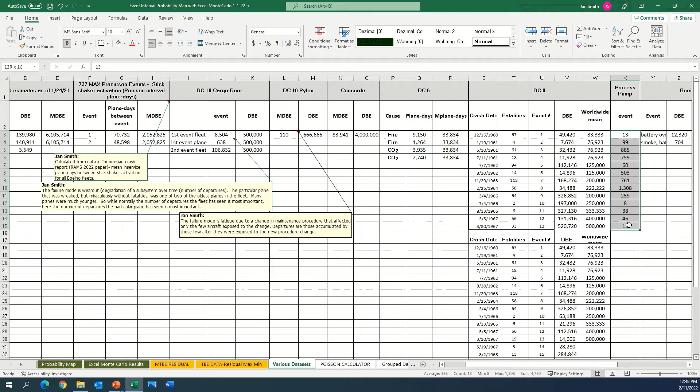So let's go to a sheet called various data sets, and you're probably interested in the 737 MAX that we're going to get to, but the concept cannot be understood and accepted if we are using only one event or 2 events. It's too special purpose. So we're going to start with a more general data set that allows the concept to be developed before we jump to the 737 MAX.

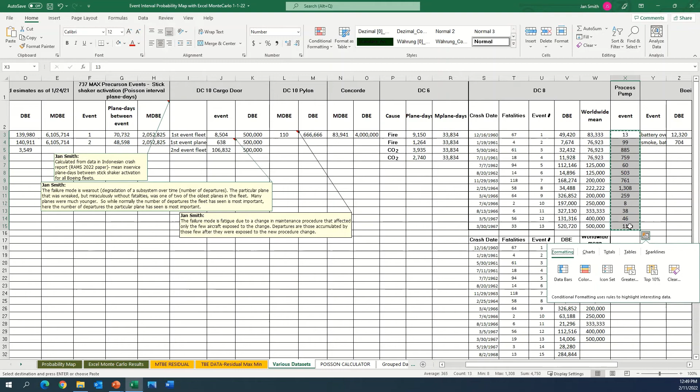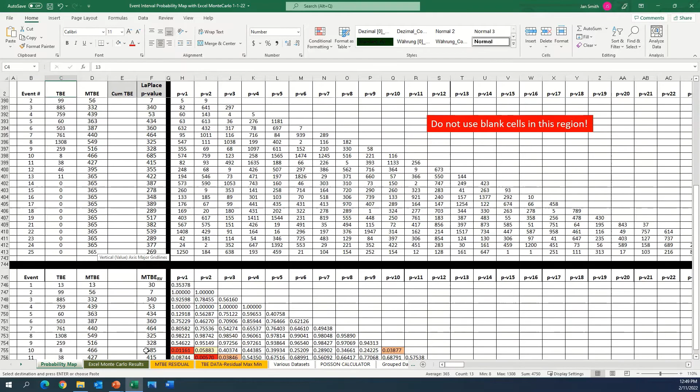So this is process pump time between failure data in days, real data from the petrochemical industry. We're going to copy that and place that into this green region. We'll maintain formatting, and the formulas that are in the cells in this sheet as well as these other sheets draw upon this data and begin the analysis.

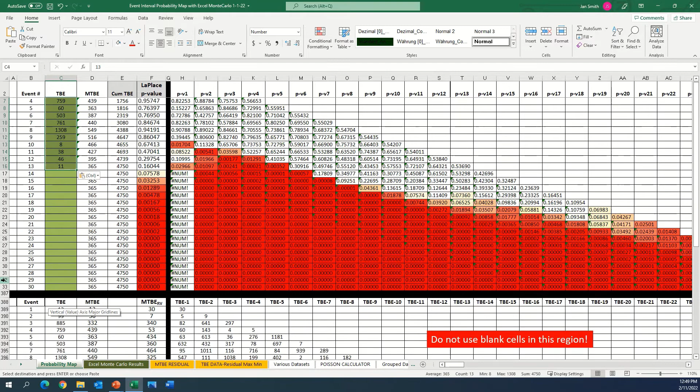So what we have here are some rows that are hidden because we're going to be scrolling between the 3 sections of the probability map, and the hidden rows allow that scrolling to be easier.

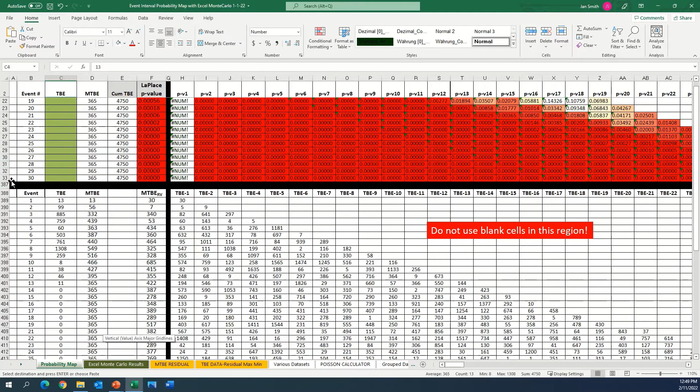There are some empty cells, and this simply is to give us a working range for our data set. Most data sets would fall perhaps within this working range. Because we have empty cells, we are generating some error messages as well as some junk numbers due to empty cells. We don't want to be distracted by that, so we cover up this image, and this image will also be helpful when we evaluate one row at a time.

Our analysis is one row at a time, and that'll be clear as to why that is as we go along. Let's explain the column headings.

The first column is empty, and that is simply for ad hoc calculations, and we'll be using that later. The event number, the first event occurs, the second event, and the analysis is conducted contemporaneously upon the arrival of the event. So the data set is developed. At this point, at event 3, the data set consists of 3 values, and then the data set consists of 4 values, and then 5 values, etc. So each line is developed using only that line and the data that is above that row.

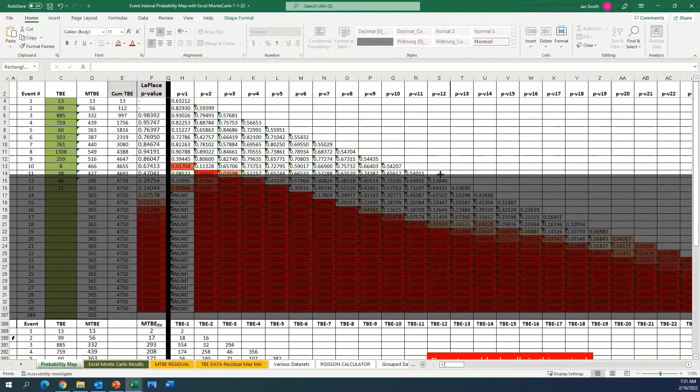p-v2 at event 11: there's 5 chances in 1,000 that this could occur by random chance when there really is no trend in the data. But that's really strong strength of evidence, stronger than necessary.

We trace our low p-values back to event 10, where the first opportunity to identify a degradation is the very first event, the very first low TBE value at event 10.

We see that there's 17 times out of 1,000 this could be a no-trend system, and we can have a value as low as 8 when the system mean is 466. 17 times out of 1,000 this could occur simply due to randomness in our values, but that is sufficiently low that we can reject the null and say, yes, there is a reliability degradation.

Despite limited data and only one short event, we can make that determination. And so we reject the null.

What it means is that for this particular pump, what should be done is to get this data the day the event occurred, right after the event. Sometimes we have to react almost in real time, but depending upon the system, we would get this number the day that the pump failed, or possibly the following day.

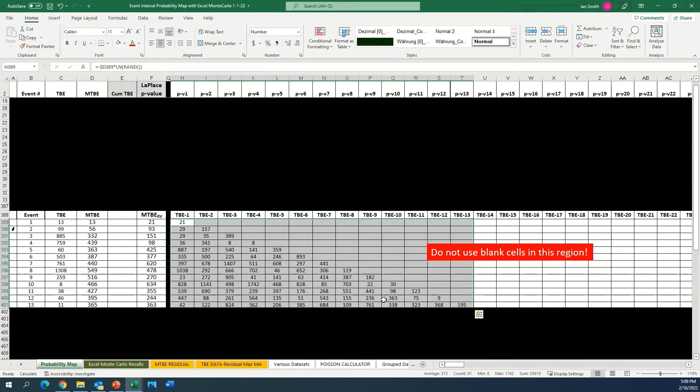Let's see how we get these numbers. Where do these TBE samples come from? There's an image off screen that will help in that regard. So what we have is that we are resampling our null hypothesis. The null hypothesis is that the system is a homogeneous Poisson process.

From reliability theory, this equation holds for our null hypothesis. Our null hypothesis says that for a complex system that is steady state as far as reliability is concerned, then this is the reliability of that system behaving like a homogeneous Poisson process and has a constant lambda. When lambda is constant, we can replace lambda with 1 over MTBF in this relationship.

Now, 1 minus reliability is unreliability, and unreliability is the time to failure. So if we set this relationship equal to a random number and solve for t, then this relationship here, where time equals minus MTBF times the log of a random number generated within Excel, this is a time between failure sample.

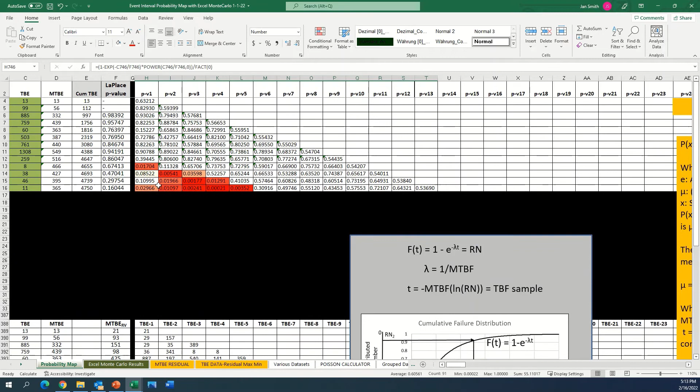Now, for each MTBE random variable number, we get a new calculation for our Poisson probability values. All of the formulas in these shaded cells are exactly these, but these draw upon the data set mean. These here in the lower thirds portion of the probability map draw upon MTBE as a random variable. And so this is how we get probability distributions around our p-values—getting MTBE as a random variable, and then using that new random variable sample to get a new sample for our probability values, which also form a probability distribution for our false positives.

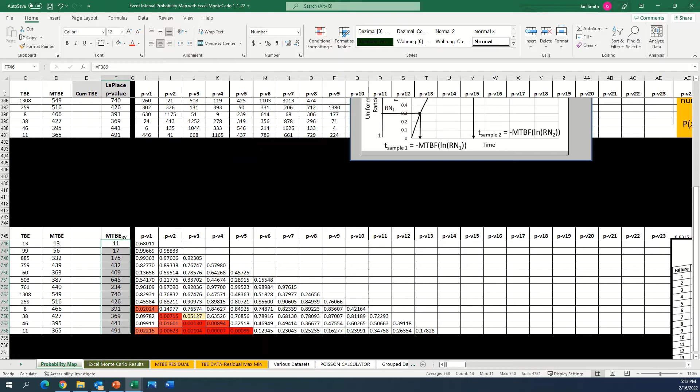So we now actually get those distributions in the sheet called Excel Monte Carlo results. We get probability distributions using this sheet. This is a 10,000 row data table and a 1,000 row data table.

We reference the cell that we want to get a distribution for here. A random variable goes there. Let's go to the probability map and let's get PV, this PV1 at event 10. We want to assess that, so let's reference that cell.

We simply enter it and go to the Monte Carlo sheet. We have to hit enter here, then go select that cell here, enter, and when we run, hit F9, it will generate a probability table with values and form a distribution.

Here in this one, let's reference the cell for the probability distribution around this random variable. It has to be a random variable cell that we select. Now when we hit F9, it will take a few minutes and we will generate distributions.

This 1,000 row data table takes a few seconds to run if this one is blank, and this one takes just a few minutes. As we'll see, the resolution of this data table is excellent, but it takes a few minutes. The resolution here is not so good, but it's good for just learning and training and exploring your data, and it only takes a few seconds.

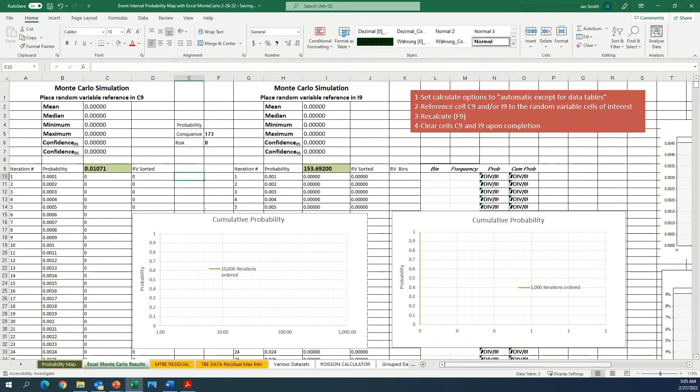These are the distributions. This data draws upon column B and column D data. So what we're doing here is generating for each iteration, by way of different random numbers, samples of our PV1 at event 10. And we are resorting these 10,000 random samples of PV1 from smallest to largest in this column. There are 10,000 of these, and because they're generated by a random number process, the distributions are smooth.

We can query column D to get confidence intervals for any level. We're set up now for 90% confidence level by referring to the proper cell in column D. Both the lower and the upper cell can be referenced. We can change this cell reference and get any confidence level, but these are 90%.

So confidence levels range from essentially 0.01 to 0.03—very tight confidence intervals, although we only have one quick failure and a very limited data sample from the pump with our unknown mean. And so this is the distribution.

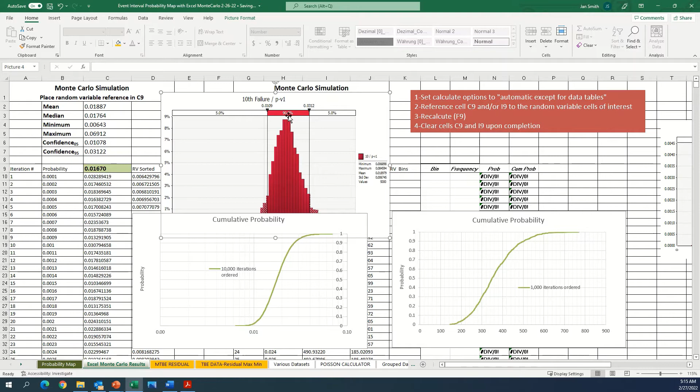If we look at some data that has been published in earlier papers, we used Palisade's @RISK Excel add-in software to analyze the PV1 at the 10th event, and this is probability density versus cumulative probability, just different ways of plotting the data. We had a lower 90% interval of 0.0109, 0.0108 close, 0.0312, 0.0312. So good convergence.

This is 5,000 iterations, and this is 10,000 iterations. Excellent convergence. Now for the

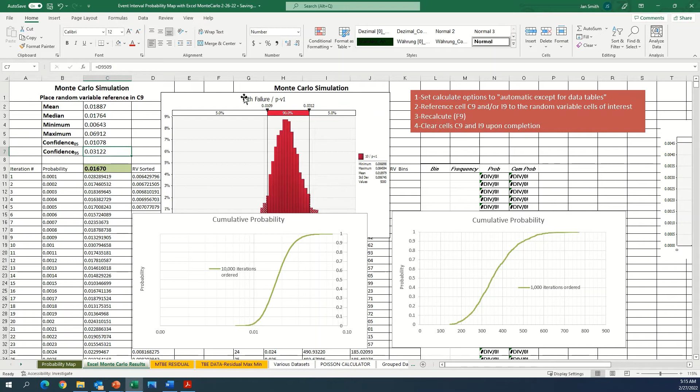MTBE at event 13, let's look at that convergence, how that works. This is 1,000 row data table—you see a little bit of ragginess. Let's look at this: 10,000 iterations, and here we had for 90% intervals 218 and 546, 211 and 551. Not so close.

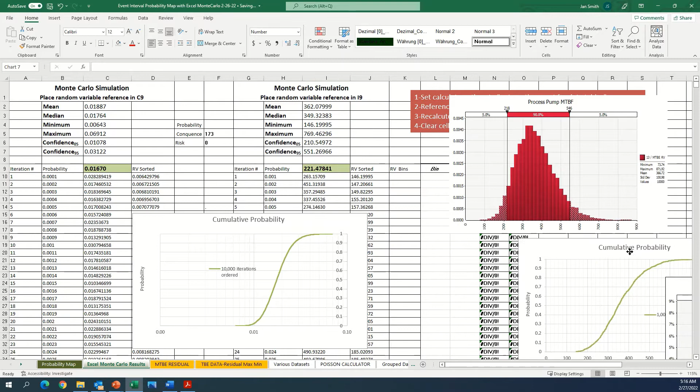For a few seconds, this is excellent for learning and training and playing around with your data. But for real results, you'd want to use the 10,000 row data table for real data.

So this tight distribution, which is also our probability of a false positive, allows us to reject the null hypothesis with a degree of confidence on the basis of one quick failure and very limited data.

So let's go back to our probability map. We have rejected that null hypothesis. Now that allows us to query the data set to see how we might change it.

Let's look at the possibility that there is early reliability growth here, that we might be able to delete these two values and change our data set to explore the degradation a little bit more sensitively. We see a good indication here that we do have reliability growth.

We don't have a distribution around our Laplace trend test p-value, but we can confirm that with a different, totally independent method. We did that with residual max-min as a random variable, and we got a confirming p-value.

We're not going to get into that - that's a video of its own - but we can delete this data and move our data set up and see how that changes.

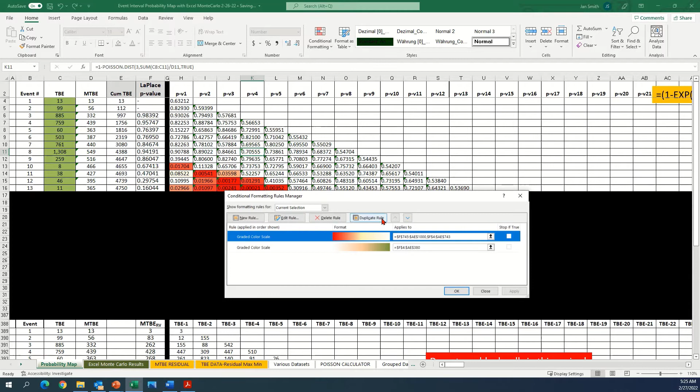Before we do that, though, let me just indicate that we can simply go to conditional formatting and change our rules so that we can see the reliability growth. That helps us to see it. Wasn't really necessary in this case, but sometimes conditional formatting is very helpful to help you see the data.

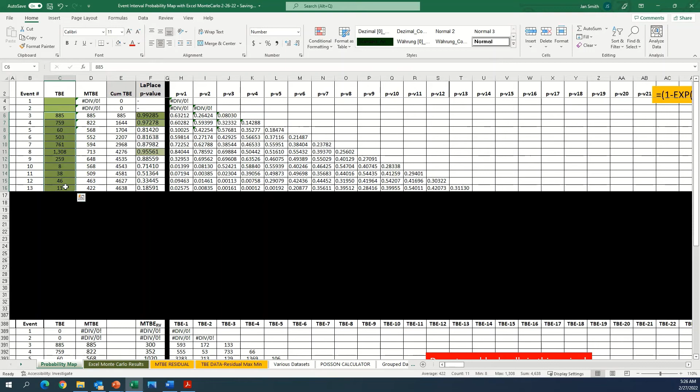So we can delete this data, move our data set up. We have two, and of course, we see that we did have early reliability growth, and that was years ago. So we might be justified in removing those two early failures that occurred like 13 years ago, and that will make our data more sensitive to this degradation in reliability that occurred later in life.

So let's change our conditional formatting rules, and you can see that if you're looking at all of these numbers, the formatting certainly helps.

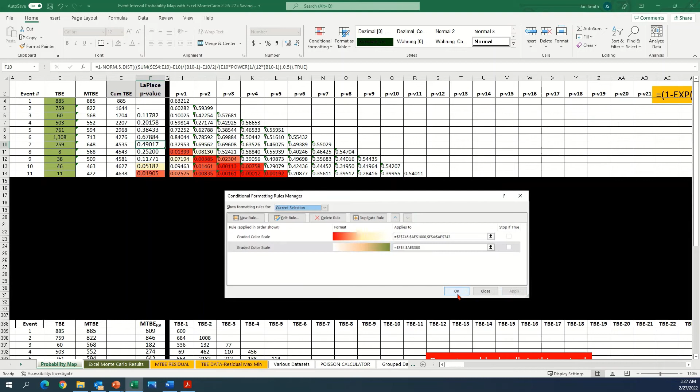So now we can see the degradation more clearly. All of these p-values drop - I think this was 0.017, that's 0.014. So the Poisson p-values drop, but the Laplace p-values dropped and lowered tremendously, and did pick up the change in reliability, or a trend in the data.

And the reason being is that Laplace looked at those two early events and gave them weight, just like it did the more recent events. Laplace looks at the entire data set when it generates a number such as this, but it's very, very helpful for looking at long-term trends in the data. Oftentimes it is much more sensitive than Poisson.

But Poisson looks for a step change in the data, which we think we see here. This data looks a lot different than these two events, or these four events. So, a step change to which Poisson is very sensitive.

Now, another thing we might want to do is measure the reliability of this pump against itself, looking for changes in reliability. And because for this pump we may not have a large population against which to compare, but oftentimes there is a large population. We didn't have it in this particular pump, but we can imagine that there is a large group of pumps.

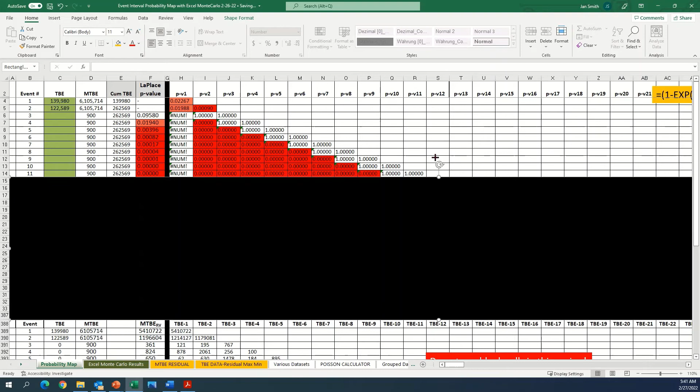So let's copy this data and move it to the probability map. We paste in special values, and we want to look at the low p-values, but let's look at the first event first, because we want to do the analysis like 1 hour after the crash, or certainly the next day.

This analysis should be done in the future. It wasn't done in the past because EIPA was in its infancy, and no one knew about it, and it had never been applied to something like a single aircraft crash. It had only been used in the process industries at that time.

So we have a p-value that would reject the null hypothesis. It says that on the basis of that single number, we could have, and in the future want to, at least consider grounding the fleet.

Now, for the process pump, we talk about investigating to see if there's a problem because of this low p-value. The low p-value signals that there may be a problem, and we investigate. For aircraft, that's not too feasible, because the hour after the crash, we don't have a lot of good information about why it crashed.

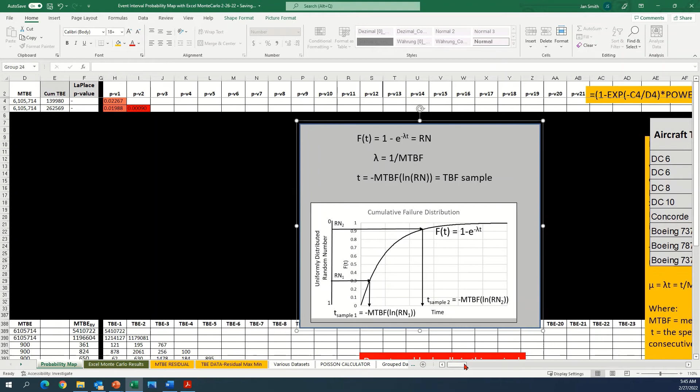And to do that, we are going to look at this image again, and we're going to—now we have not rejected the null hypothesis yet—look at these numbers using reliability theory. I say it's a different concept, although we'll see that the mathematics behind the concepts are identical.

I say they're independent because if Poisson probability did not exist, we could still get the same numbers using reliability theory. For our null hypothesis, the unreliability distribution, or the time to failure distribution, holds for the null hypothesis, which we have not rejected yet. And so we can generate several thousand time between failure samples, and we can generate this cumulative failure distribution where the MTBF here is our worldwide mean.

So let's see what the time to failure is for—let's go back to PV1. We will get a time to failure distribution that will equal this number using reliability theory, and we'll do the same using this number using reliability theory.

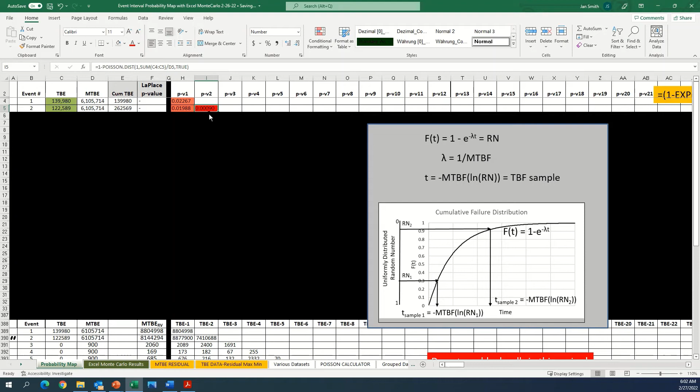Let's select a cell that allows us to duplicate this PV2 number. For that one, we don't have an existing cell, so we use this blank column for ad hoc calculations, and I've entered what we need. We need the sum of 2 events that are drawn from our worldwide mean. So I have the sum of these 2 TBE samples here. This is the cell we want to reference.

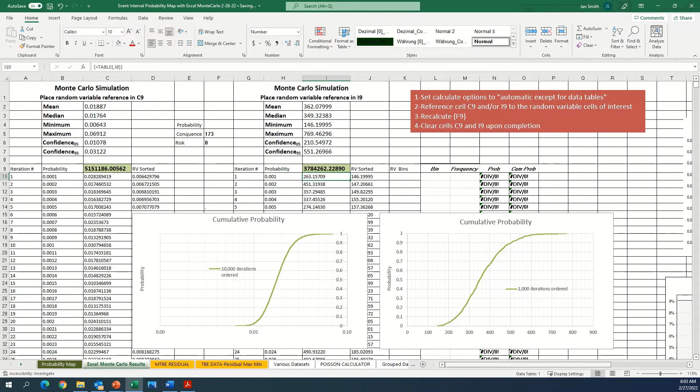Even though this is only a 1,000 row distribution, for our purposes, we'll do both at the same time. So let's refer to this cell. We hit enter, and then we'll hit F9, and we'll have our 2 distributions using reliability theory. We are working on the data tables now, and it will be a few seconds. After a few minutes, not a few seconds, these are our distributions.

I've reformatted the x-axis and changed to a log scale because we want to examine the left-hand tail of the distributions. So for this first distribution, we're looking for 139,980. We want to know what is the probability of the worldwide fleet failing by that period of time. So we can go to 139,980, back to our distribution.

We can come up and across and read it, but the better thing to do is to go to the column from which the data comes from, column D, and let's go down and find 139,980 and read the distribution that way. And so 139,980 is somewhere between these 2 values. Let's just select this one, and we will paste it back here somewhere for just reference, so we won't have to remember it.

It compares, not so close to that, but if we increased the number of iterations, we would equal that number because of the underlying mathematics being the same, and we'll talk about that in a second. But let's go back and look at

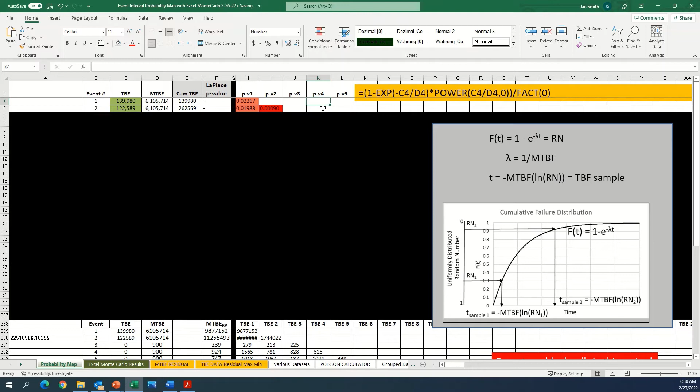These p-values are based on the time between events being drawn from this population, if you will. Let's examine the fact that that's not exactly the case here, because this worldwide mean is based on mature aircraft with proven designs being in service. This is immature aircraft with unproven designs.

So these p-values could be an upper bound on the probability that the plane is reliable relative to the worldwide mean. Again, these p-values are false positive. They reflect the probability that the aircraft is as reliable as the worldwide mean.

And so because this is a new fleet with an unproven design, let's look at what that means. In the 75-year history, starting with the DC-6, there have been several new design flaws that existed on new aircraft designs that were introduced into service while the flaw existed. They were introduced into service while unreliable, and the flaw was discovered in service. These slipped through the design and certification process.

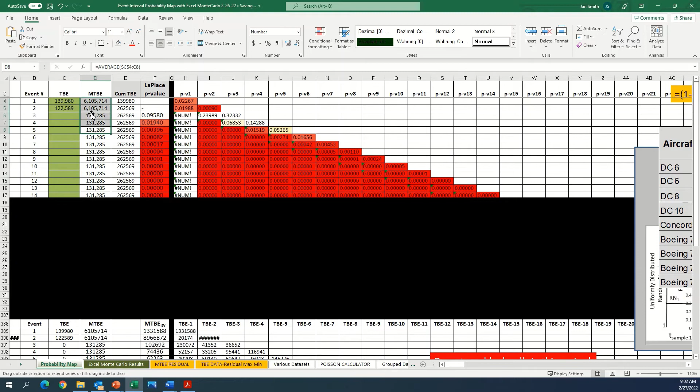To start with doing that, we have to replace our parameter for the population mean with the MTBF after 2 events, when we are drawing samples from a system with an unknown mean. So we have to go back to our Poisson equations here. This is the average of the 2 samples.

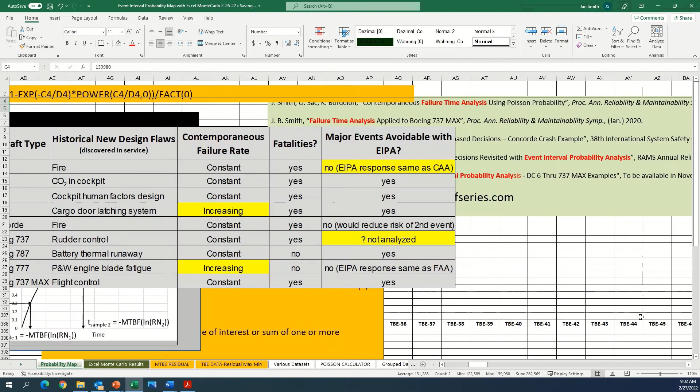We can measure the risk of continued operation, but we are going to make our first conceptual assumption. So far, all of our assumptions have been with things like, for example, input data. We have calculated input data, but there are assumptions associated with that, because while the FAA and Boeing may have exact numbers, I know that they do, we have estimated numbers because not all of them are published.

So we've estimated input data in various ways. Now, conceptually, we're about to make our first assumption. We are going to use this cumulative failure distribution and generate 10,000 samples that will form a probability distribution of the time to failure for our system that has an unknown mean. MTBF will be a random variable — it will be the MTBF after 2 samples of data.

Now, up to now, lambda has been constant by definition because we've only applied this to our null hypothesis, which by definition has a constant lambda. Now we've rejected the null hypothesis and we're going to assume a constant lambda.

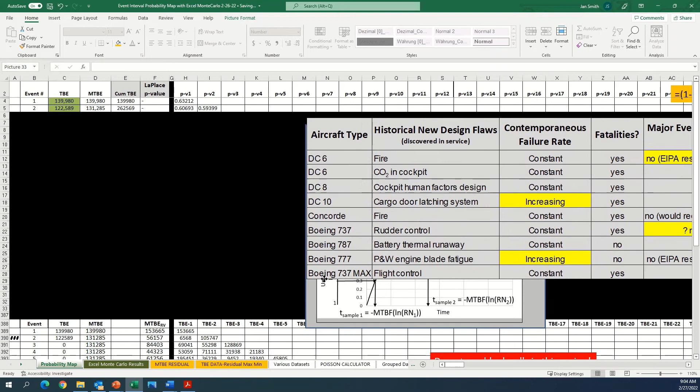Now, what is the basis for that assumption? Well, let's go back and look at history, for example. In all of these cases where we've discovered new design flaws in service, almost all have been a constant failure rate. There have been 2 that were an increasing failure rate.

Now, if this should be an increasing failure rate — doesn't look like it's increasing — but if it is a decreasing failure rate, or if it is an increasing failure rate, then an assumption of a constant lambda will be a lower bound estimate on the increasing failure rate.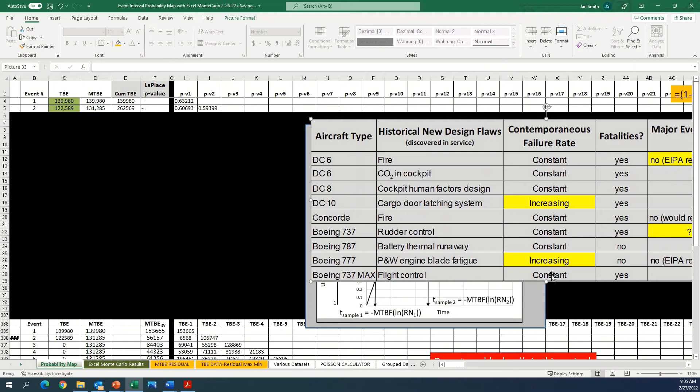There's been no case in the history of a decreasing failure rate, and I can't imagine there being one with a system in which the production process is continuously introducing new aircraft into the population. So the assumption of a constant failure rate, if it gives us a risk that is unacceptable, then it will certainly be unacceptable should the failure rate turn out to be increasing. So this is the basis for the constant failure rate assumption, and I think that it is good and reasonable and logical. So we're going to use this relationship.

This relationship doesn't exist in any of these cells now. So we go to column A, that is for ad hoc calculations, and I've built this equation into this cell, drawing upon the MTBE as a random variable after 2 events. And so we can refer to this cell, I place this cell in the 1,000 row data table, this cell in the 10,000 row data table. I've already run the results, and this is the distribution for our MTBE after 2 events.

We have a very wide distribution because we only have 2 events. If we had 200 events, this would be a very narrow distribution. But again, EIPA uses the data that exists because we don't want 100 events or even 10 events. We want 1 or 2 or 0 would be ideal. So we're after using the data that we've got, not trying to generate data so that we can narrow our distributions.

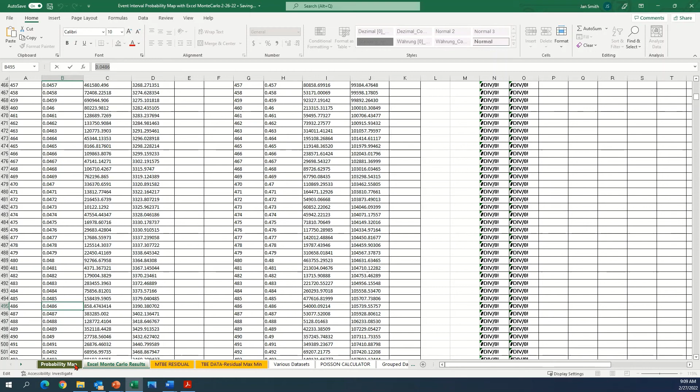That's the probability of failure, or in our case, a third crash within that 3-day period. So let's go back up, and what we can do is paste this value here. This is the probability of failure, so we paste that value in.

This is the consequence. Now the plane is either going to crash or not crash, and the number of fatalities are either going to be 0 or everyone on board, presumably. So for the consequence, though, we might take the average for the 2 crashes, and that's what the consequence of the issue is. When we multiply probability times consequence, that gives us risk, and here the risk is 8.4 fatalities.

And so that 3-day delay should be considered as costing 8.4 fatalities. Now, you know, the true risk, there's either going to be 0 or 173, but this quantifies that risk in a way that we can manage it. To say that the risk is 0 or the risk is 173, both of those are wrong, and so this is the correct answer, and we should act as though those fatalities actually occurred.

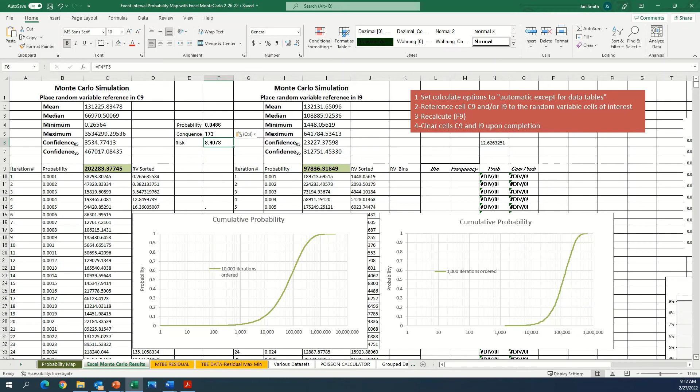We've seen the benefit of analyzing crash event data because we can eliminate the risk of a third crash, and by analyzing contemporaneously upon the first event, we can eliminate the second event on the strength of probability values.

Now let's look at the possibility that we can analyze precursor events that occur prior to this first event, analyze precursors in order to eliminate even the first crash.

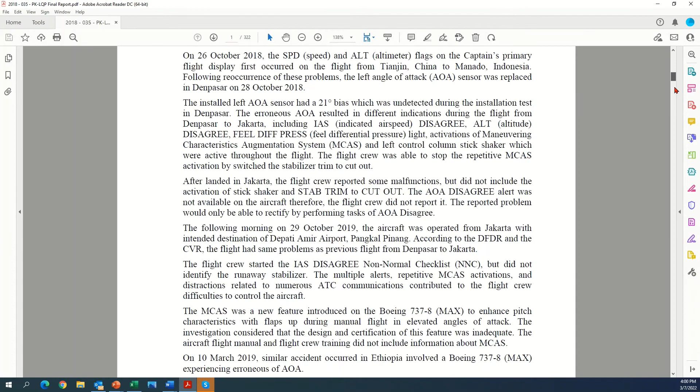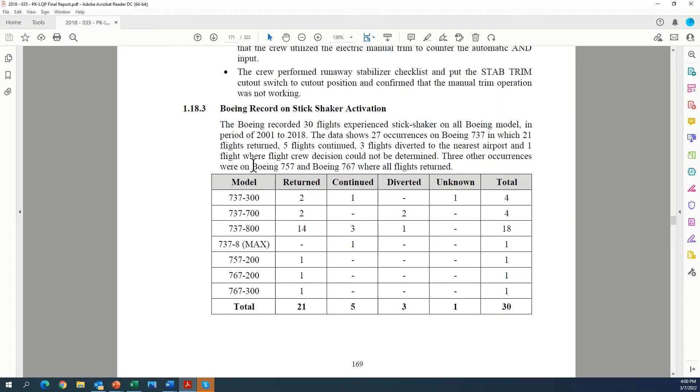As it turns out, there are precursors that we can find to identify an unreliable aircraft before the first crash. So let's go to the final report of the investigation on the first crash that occurred October 29, 2018. Buried within this report is the beginning of a precursor. It's some of the data we need to identify the precursor, on page 169. This is a record of stick shaker activations on Boeing fleets during a period of time from 2001 through 2018.

This data is here for a reason totally unrelated to a precursor, and I won't even get into that. But this data is some of the data that we will need.

So we're going to take the model number and the total number of stick shaker activations. A stick shaker activation is like a warning system of an impending problem where action needs to be taken. It's not important that we understand the event, just that this is a countable event over a continuum that we can measure. And we're going to measure our continuum as plane days in service.

Every time we talk about analyzing events, I may have spoken about analyzing events in this video, but almost always when I talk about analyzing events, I really mean event intervals. So we're going to analyze stick shaker activation event intervals.

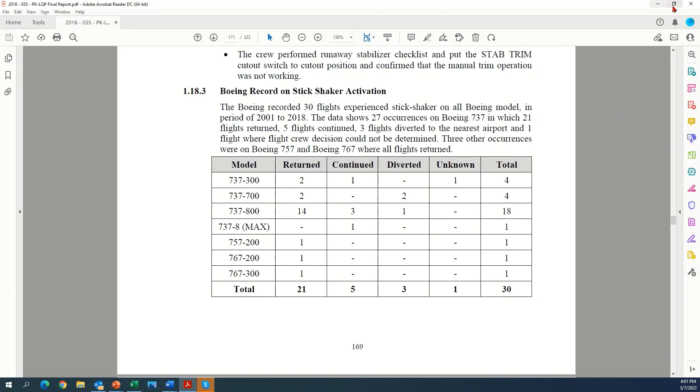We take this model number and the total number, move that back to our workbook, and in a sheet called plane deliveries and interval calcs, we paste in or transpose the data from that crash investigation report into this gray section here. These are our Boeing types, with all of Boeing at the bottom, and the number of stick shaker activations recorded in this period of time.

There's no direct indication of a precursor here, a precursor that can be a red flag or warning of an impending catastrophic failure. The MAX only had one event, whereas the 737-800 had 18 events. So if there's a problem anywhere, it would appear to be on the 800.

But then we're going to get plane days in that interval. We get that from downloading data from the Boeing website, which includes, among other things, the delivery date for every plane by the model series. So this data has been captured by filtering using these filters, as well as if statements that are in column P.

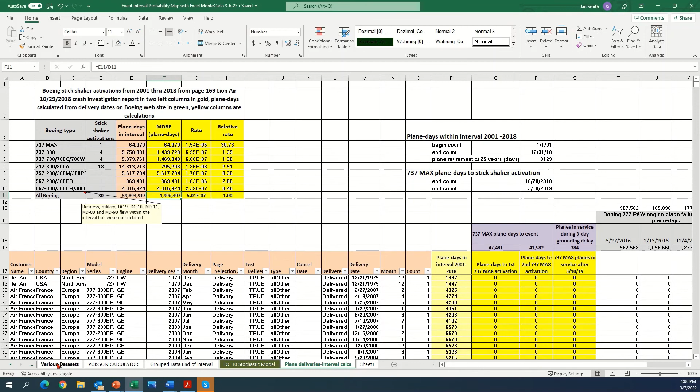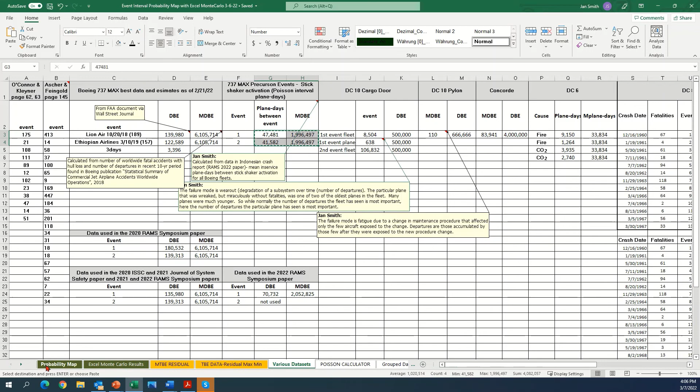We can move that data to our various data sets, and I've already placed that data here, so we can copy this data and move that to the probability map and analyze it just like we have any of our other data. So we paste that in, and we do have p-values that are capable of rejecting the null.

Now let me explain one thing. These p-values are almost the same p-values as we had earlier, and that is by the magnitudes, by coincidence. This mean that we're measuring against is the mean Boeing stick shaker activation - the mean for the stick shaker activations. Now what we had before was the mean fatal accident, the mean time or mean departures between fatal accidents for the worldwide fleet. So those things have nothing in common. So if you see a similarity between these numbers in terms of magnitude and the ones that were there before, it's coincidence.

Now the ratio of these numbers are almost the same, because they basically occurred almost right on top of the fatal accidents. This was 1 day short of the accident date, and this was on the day of the second accident. But the magnitude of the numbers is independent of what was there before.

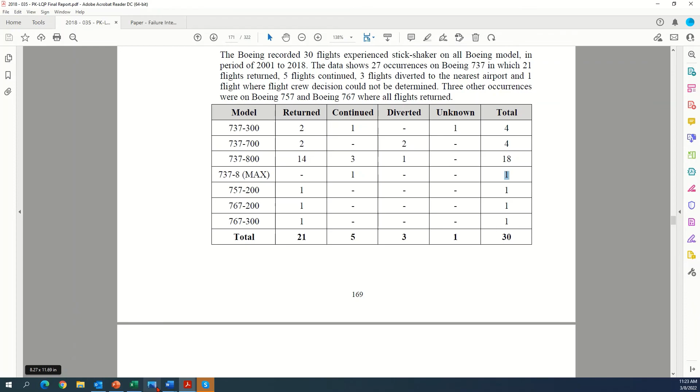And so there's a strong correlation between the precursor and the crash. For the MAX, it's essentially a 1-to-1 correlation - one precursor equals one crash. And that is why the short window of opportunity to respond. So even with automation, it may be hard to respond within that period of time.

By automation, I'm talking about automating the analysis methodology. But if the plane had been repaired properly, that first crash would not have occurred the next day, and that first crash would have been pushed off into the future. And indeed, event 2 would probably have been our first crash had we repaired the plane properly back here. So event 2 would have been our first crash, and we would have had about a 4.5 month period of time to respond and react to this low precursor.

Now, likewise, the crash that occurred, event 2, did not necessarily have to crash. We had a strong stick shaker activation, but the crew could have somehow overcome that. And the first crash could have been pushed off into the future. But these precursors remain. So as we conceivably overcome the crash event through maintenance or through skilled flying, we could have had these precursors before the first crash. So in this case, the precursor was so strong that the precursors and the crashes are almost instantaneously together. But in general, we have a response time to be able to respond to these precursors.

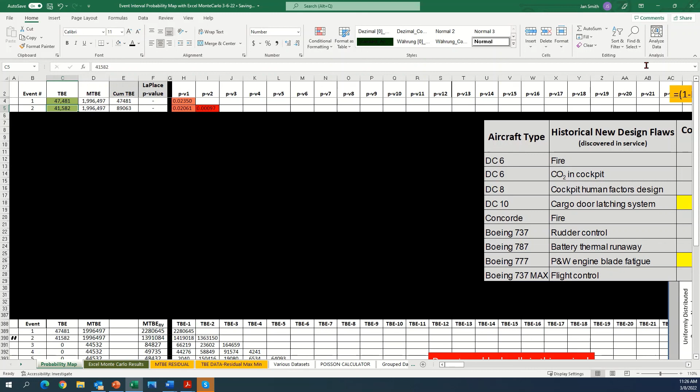This table is for 4 aircraft types and 5 different design flaws that were discovered in service. Each one of these design flaws had 2 primary events each. Now, for the 787 battery thermal runaway, there was an event that occurred on the ground and not in service, and I consider that a primary event. So with that understanding, all the others were crashes or emergency landings. The FAA and predecessor organizations failed to make the right decision or take the right action upon the first primary event. Therefore, a second primary event was required to draw attention to what eventually turned out to be a design flaw.

Now, EIPA failed to recognize the first primary event upon the fire issue on the DC-6 in 1947. EIPA required the second event before it had a p-value sufficiently low to reject the null hypothesis. On the other 4 occasions, the unreliability of the aircraft relative to its peers was recognized upon the first event.

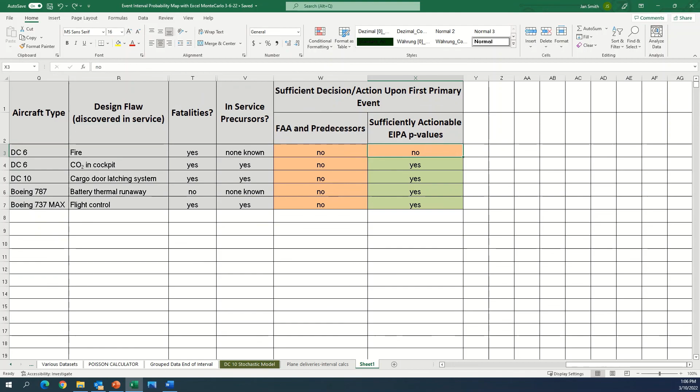I want us to understand that what we are doing is analyzing not events, but event intervals, the intervals between events. And what we're doing by way of p-values is identifying intervals that lie outside a reasonable expectation, a reasonable expectation as defined with probability values. So they flag us of events that are too short or too long relative to what we should expect in our range. And the events do not have to be equipment failures or aircraft crashes or something of that nature.

In looking at this video, I'm concerned that perhaps you may think that it is applicable to equipment issues only. But let's look at this situation. Derek Chauvin pled guilty in a trial related to George Floyd's death just a few months ago. And in pleading guilty, he also pled guilty to excessive force used on a 14-year-old black boy, where he held his knee on his neck and hit him over his head with a flashlight to the point that it required stitches.